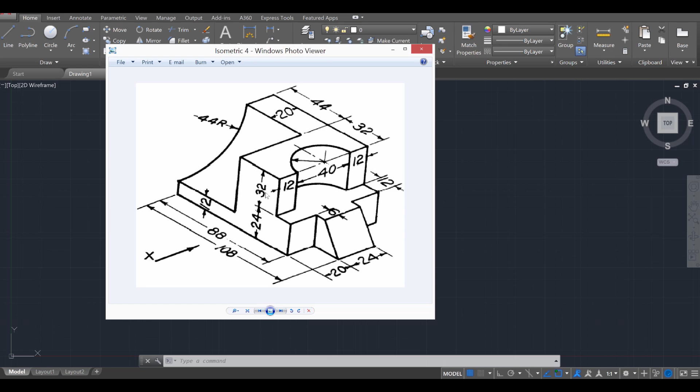So let's go ahead and make that. Switch it from your top over to a southwest isometric. Make sure your ortho mode is on, make sure your snap mode is on, and then we're going to start drawing some lines.

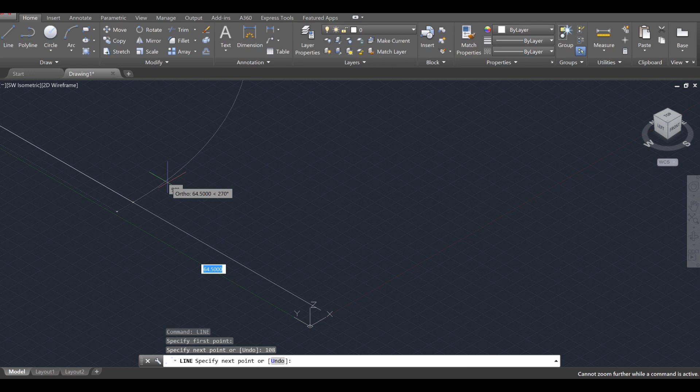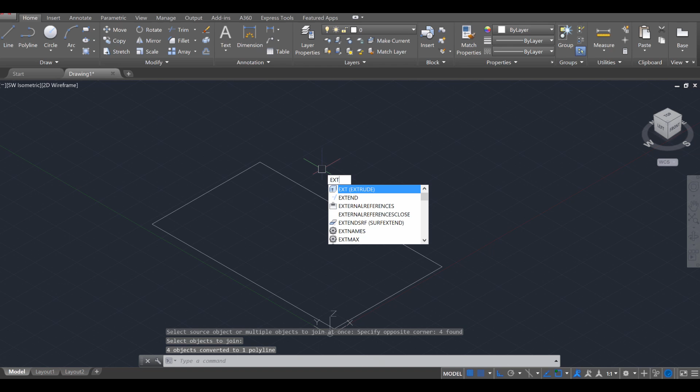Go ahead, line, enter, and the first line we draw out is going to be fairly large, so make sure you have enough space. It's going to be 108, enter, okay? I'll press escape once so I can zoom out enough, then enter again to reactivate the line tool. Then I'm going to go up a total of 64, and across another 108, and connect this all together. I'm going to use the join tool to join all these into one, then the extrude tool, EXT, enter, click on that, enter, and draw this out a total of 56 units.

Okay, so we've drawn out our box. Now we just need to draw out the things that got to get cut out of the box.

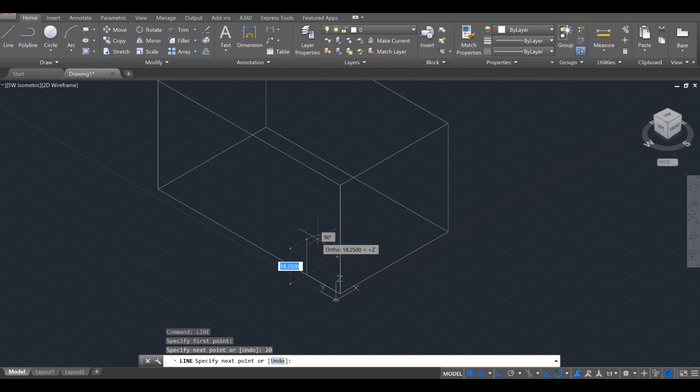That ramp on the bottom over here, we're going to use the line tool, enter, and starting at that corner, I'm going to go across it looks like 20 units, enter. Then I'm going to go up a total of 24 units, enter. And then I'm going to go across here, but not all the way to the end. First a total of what appears to be 6, enter, and then go the rest of the way. So I'm going to click there, press escape twice.

The reason I did that is because I'm trying to create the ramp as well. So if I use the line tool now, at that point where I measured out 6 before, I can go ahead and connect that in and create that ramp over in this area there. And let's cut it out. I'm going to draw one last line from there to there, then use the join command to join these three portions together.

Then I'm going to extrude it, EXT, enter, select that, enter, just across like that, doesn't really matter. Enter, escape twice, and use the subtract command, SUB, enter, select the large one, enter, then the small one, enter. If you did it correctly, it should have cut out the entire section with a ramp, which is totally fine with what we're going for.

Then what we're going to have to do is redraw that line that we just cut out. So line, enter, redraw that line, escape twice, and just make sure I have all 4 lines, which I do. So I'm going to join these together, enter, that line, that line, that line, and that line, enter.

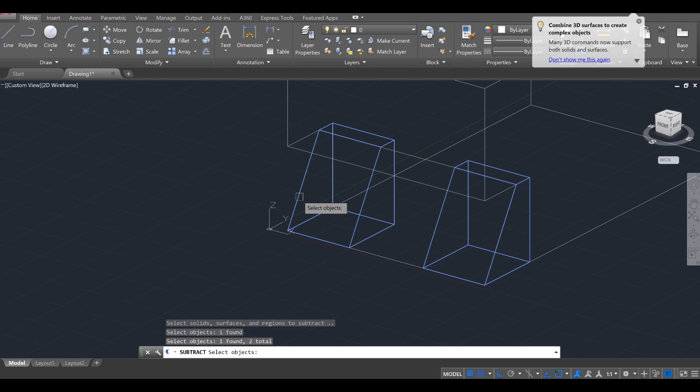Okay, and then I'll just rotate to this one as well. This one has to be extruded 20 units as well. Okay, like so. Then I'll use the subtract command again, the big one, enter, the small ones. Let's see if I can do both of those simultaneously. Looks like I can, so both of those have been cut out.

Next we have to make the top cut up here.

We are going to need to put a circle in there. What we know about the circle is it has a diameter of 40, as well as it's 12 from the side here, but don't let that mislead you from the true side, which is actually the difference between this 88 and 108. So that's 20 plus 12, so we actually need to be 32 from this edge over here.

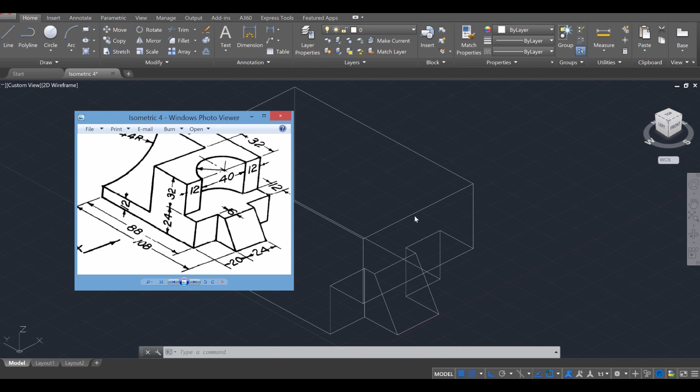Let's go ahead and get started with that. I'm going to use a line, enter, and start from the center, draw that out till I see the triangle - that's the midpoint. Then I'm going to go up a total of 32, enter. So that's where the circle's center is. Then I'm going to draw a circle, enter, at there.

This is going to have a radius of 20, so I'm going to type in 20, enter. Then I'm going to draw some extra lines in, so L for line, and look for the center point for the top part of this circle, which will be right here. Click on that and just go vertically up like so, and then across like so, so that's connected. Escape, enter. I'm going to do the same now for this quadrant.

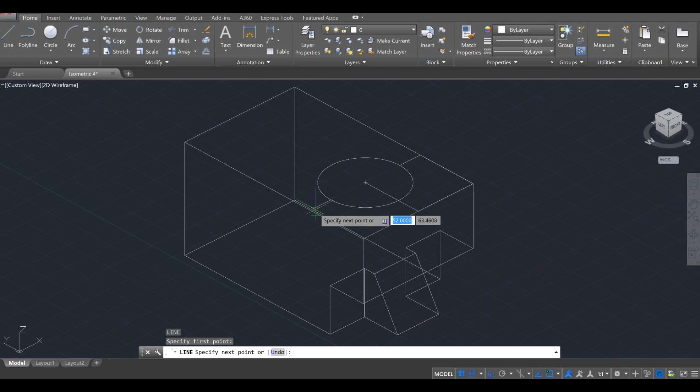I'm going to go over to the side over here, and just adjust my view so I can see it a little more clearly. Connect it to there, and then connect it there to the center point. Okay, so everything should be connected.

I'm going to use the trim tool to remove any excess lines. I'll select the entire thing. I need to cut this line off. Okay, so you're left with that portion as well as that, and I could just select and delete this part. Okay, so I have all the lines I need.

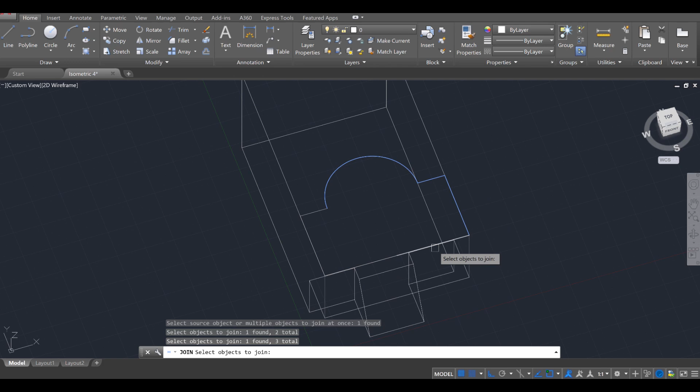Now I'm going to join them together. Join, enter, and select these objects here. Enter. So now they've all been joined into one polyline, and now EXT for extrude, enter, click on that, enter, and we're going to go down a total of 32 units, enter, like so.

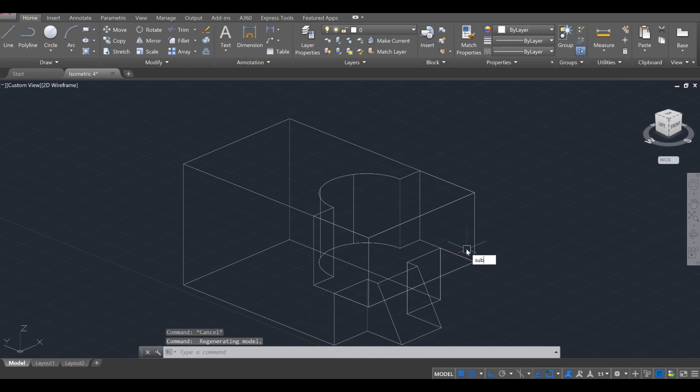And then we're going to cut it out. So we're going to use the subtract tool, enter, select the big one, enter, select the small one, enter, and if you did it correctly, it should have subtracted it from the top. So that's looking great. Now last we need to work on the back side here.

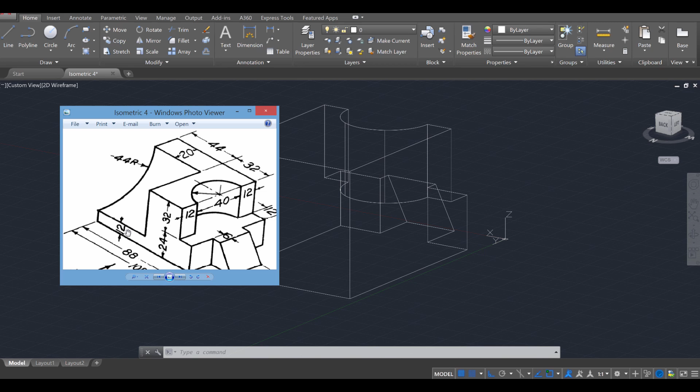At first glance from the sketch, you might feel like they don't give you enough information, but they actually do. They tell you the radius is 44, and you know the outskirt is 12 away from the bottom, 20 away from the top. So the center of this circle with radius 44 is up 56, and to the side 64. Let's go ahead and make that.

From this edge over here, I'm going to draw a line, enter, and I'm just going to go out this direction, a total of 64 units. So I'm going to type 64, enter, and then that is actually right on the edge there. Then going up, I'm going to go up a total of 56 units, enter. So that's actually right at the corner there.

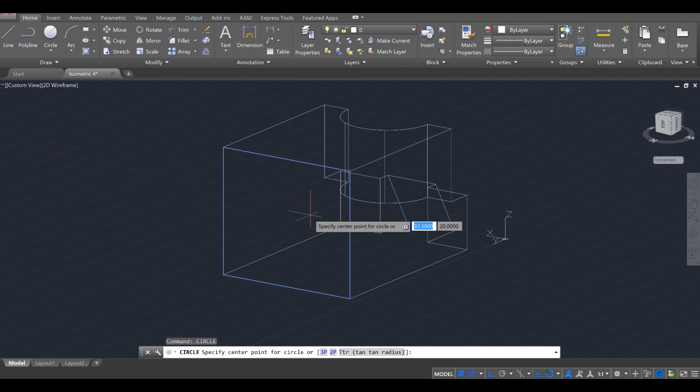Now that I know that's at the corner, I'm actually just going to delete these two lines, and I'm just going to draw out a circle. So CIR, enter. Go to the, you want this surface to be lit up. And then I'm going to click on the edge, and I'm going to draw this out, so it's going to have a radius of 44. I'm going to press that, press enter, and that's the circle that we're going to need.

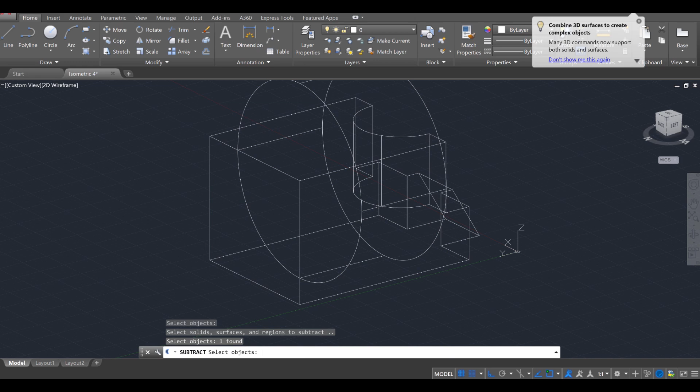We're going to go ahead and extrude this out, EXT, enter, that one, enter, a total of 44 units, like so. And then we're going to use the subtract tool, SUB, enter, from the big, enter, to the small, enter, like that. Okay, so I'm going to revolve it back towards you. And that's the object. This is a shaded view of the object, and that is going to conclude this tutorial.